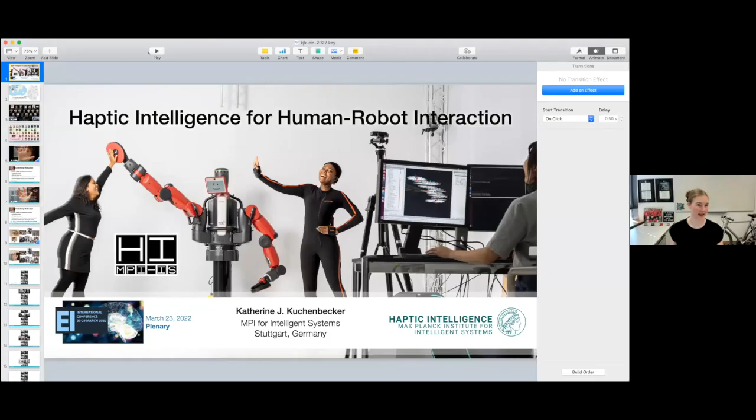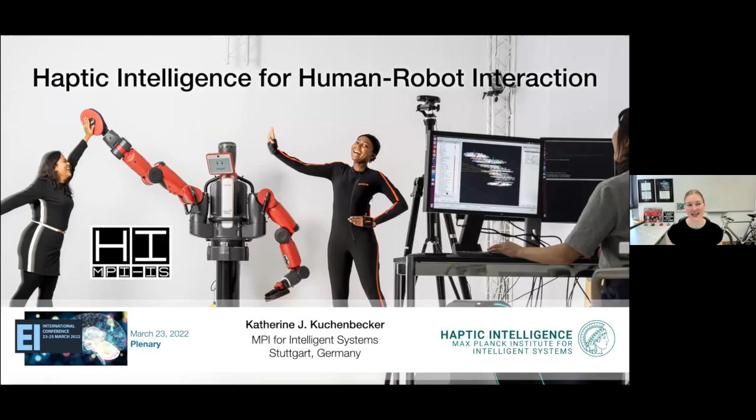My name is Katherine Kuchenbecker. I'm a director here at the Max Planck Institute for Intelligent Systems, and it's my pleasure to give this plenary talk to tell you a bit about research that my team is doing. Although my name sounds German, I'm actually American, and I grew up in Los Angeles. I did all my degrees in mechanical engineering at Stanford University. And I did a brief postdoc at Johns Hopkins with tomorrow afternoon's plenary speaker, Allison Okamura. So you should definitely go to her talk and all the other plenaries. It's really a delightful set of speakers you put together.

After I did that short postdoc with Allison, I started my faculty career at the University of Pennsylvania as part of the GRASP lab. I chose to go to Penn because it had this interdisciplinary spirit. It was in the engineering school between mechanical engineering, electrical engineering, computer science, and biomedical engineering. We had lots of connections to neuroscience and psychology, and they really transformed how I thought about research and what it meant to be doing interdisciplinary research in embodied intelligence, in robotics, in AI.

In January of 2017, a little more than 5 years ago, I moved across the Atlantic to the Max Planck Institute for Intelligent Systems. This is a map of Germany. We're here in the southern part of Germany. I work in Stuttgart, and we have another site in Tübingen. Our institute is quite young. We were only founded 11 years ago, and it's a big institution. We are extremely lucky to get generous taxpayer-funded research money for research in all areas of intelligent systems, which I think overlaps very well with the spirit of this conference.

Our institute has directors at the top. These are like the endowed full professors who stay here for the rest of our career. We have a wonderful set of group leaders who work here for 5 to 7 to 9 years and then go out and get a professorship somewhere else. Maybe in your field you know some of my colleagues, Michael, Moritz, Bernhard, Christoph, or Metin, or some of our group leaders. This region we call Cyber Valley, and there's really a lot of investment here, and it's a really exciting place to work.

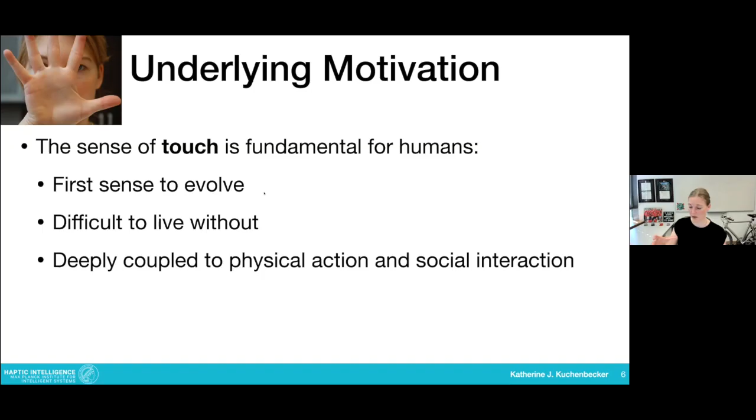So I want to reach out and pick up this glass of water. Touch is involved in how I move my body, how I come into contact with the world, how I stay safe, how I interact with other people, how I feed myself. And it's spread throughout your body. Unlike your eyes and your ears, which are very localized organs of perception, your skin is a huge organ and has many, many different channels.

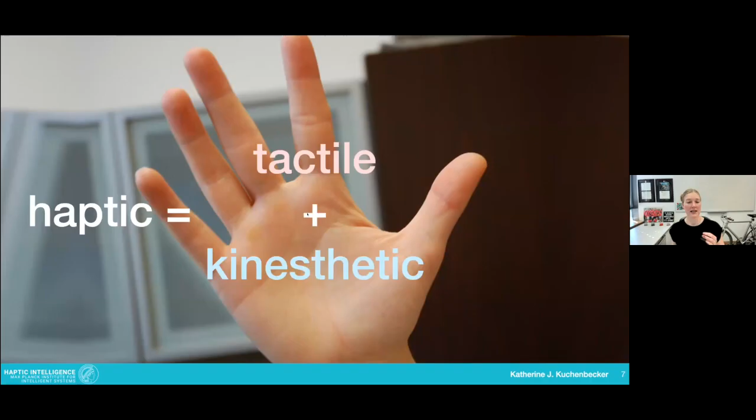And so when I talk about your haptic perception capabilities, I usually split it into your tactile system and your kinesthetic system. Some people call tactile cutaneous. This is everything that's actually in your skin, so wrapping you all around your body at the interface between you and the rest of the world.

And the mechanoreceptors that are embedded in your skin give you the ability to sense where contact is happening, how it's pressing, is it stretching your skin, are things slipping across your skin, is something vibrating against you, is a tool that you're holding vibrating as it hits something, as it cuts, is your skin changing temperature, is heat being added or removed from your body. And we have a little bit of proximity sensing in terms of hair follicles on the hairy skin.

It's also really important to understand that skin is not uniform. So the skin all over your body is adapted to the location. And so the number of receptors at the tips of your fingers is higher than at the next area of your fingers, and then the other areas on your palms. And that's the glabrous skin that is very finely tuned. And then the hairy skin has broader receptive fields, and it's not as densely innervated. And even among that, different regions of your body have different levels of sensitivity. And so there's a lot to know, but that's probably a good start.

Your kinesthetic system, also involved in proprioception, is knowledge of how your body is moving in space. And so this comes from, you can feel, not consciously, but subconsciously, the lengths and velocities of your muscles, the forces in your tendons and ligaments, and the angles of your joint receptors. And robots, like a robot we design and build, would tend to have sensors more like this, and not so much of these tactile sensors.

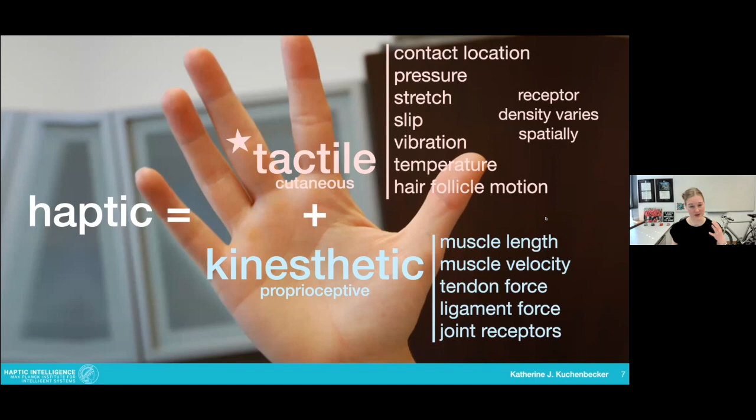And I think tactile sensation and feedback represents a huge uncapitalized-on opportunity for robotics and general technology. And so this is what I'm really fascinated in, and hopefully I'll get you excited about it today through my talk. So if the sense of touch is so important to humans, you might wonder why then so many engineered systems that we interact with each day basically ignore the user's sense of touch, or the sense of touch of the system. What do I mean by that?

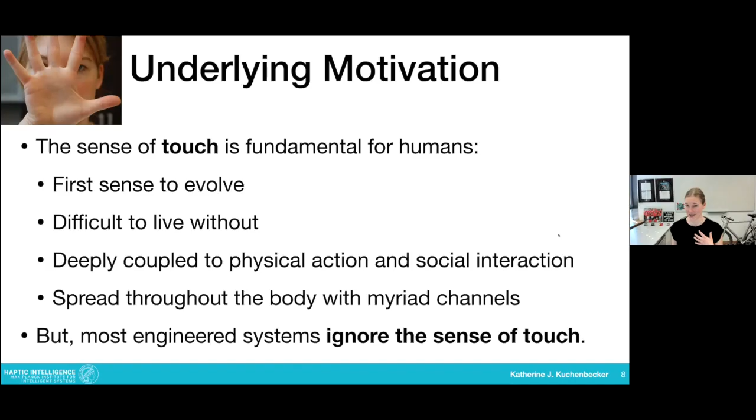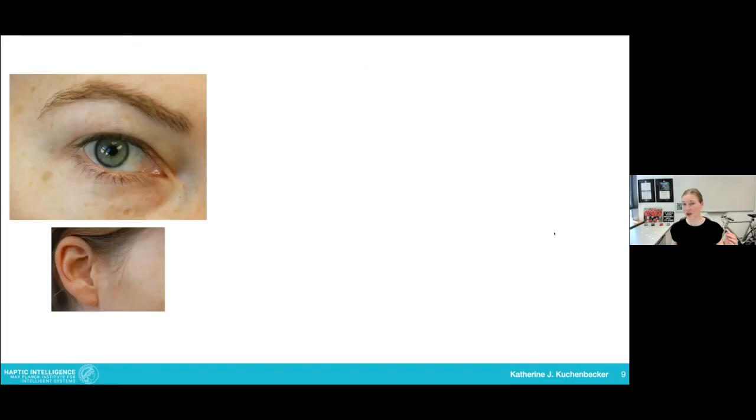I think if computers could draw a picture of what users are like, they have an eye, maybe they have two, probably just one, they see visual stimuli. You can hear things, and maybe there's a hand, or maybe it's just an index finger. My iPhone can feel when I touch it, which is good, but it never presents programmable sensations to me. I pet my cat, Toby, or feel fabric of something I'm shopping for online, and it always just feels like glass. We don't have digital display of haptic sensations on screens or in virtual reality. Systems can measure my motion, but they don't present sensation. So those digital virtual interactions that we can have are very different from the physical interactions we have in the world.

This also happens when people are remote controlling robots, say for robotic surgery, which is a topic I've worked on a lot. I can see very well inside the patient. These robots are being used right now around the world to operate, to remove prostates and do other minimally invasive procedures. But the surgeon cannot feel what they're touching. They can only see. And that's very different from manual interaction, from open surgery. And I think it's part of why this technology hasn't delivered on the promises that everyone thought, oh, it's the future, but you can't feel. You should be able to feel in the future.

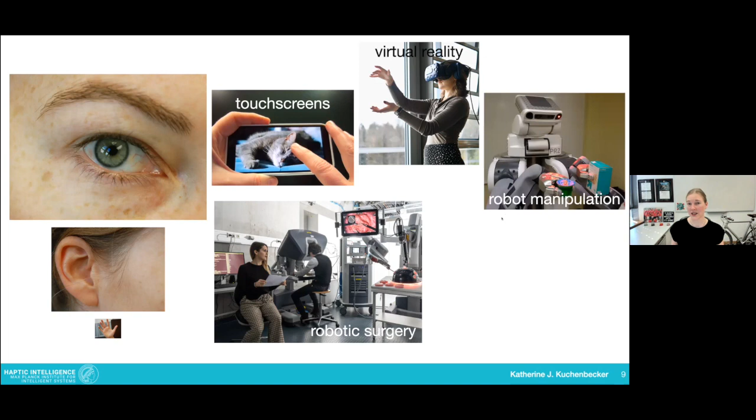If we then turn to robots more as autonomous agents or semi-autonomous agents, they also lack haptic sensation. I'll talk more about this, even when, and especially when, they're there to interact with people. They're basically numb all over, no sense of touch. People have a really hard time functioning with no sense of touch, but we give our robots almost no sense of touch.

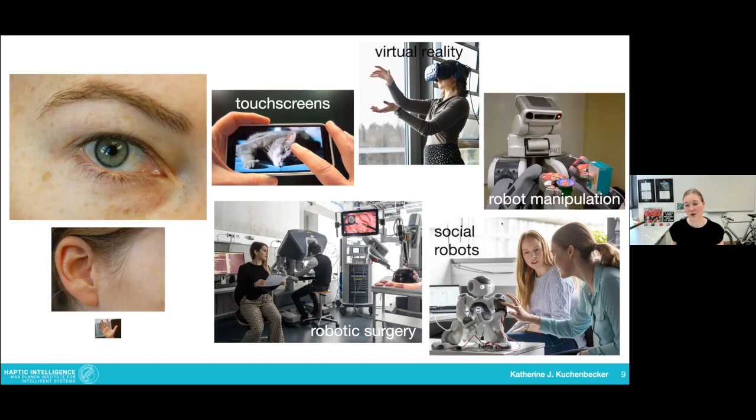So my mission as a researcher these days, I would say it very succinctly, is to try to bring physical interaction and touch cues more to the forefront in all these different engineered systems, whether that's feedback for humans or endowing robots with a good sense of touch so that they can more capably interact with the everyday world, which is unstructured and messy and has people in it.

So my team, we work in 5 main fields. There are a lot of overlaps between them, but at the basic level, we're often looking at how fingertips function, what you can feel. The mechanics of soft frictional contact are fascinating. We use some of that knowledge to design and refine and characterize haptic devices, which you'll hear more about in Allison's talk, but are mechatronic systems that create sensations for people to feel, either from a virtual world or from a remote environment when you're controlling a robot.

We work a lot on this, how to add haptic feedback as a user is controlling a robot remotely, how to understand their skill learning over time, how they can train, how they can improve more quickly. Can we automatically assess their skill? And then now turning more to where robots are an agent, we've also been doing a lot of work in physical human robot interaction. And then at the end, touch sensing, inventing new touch sensors. And it's these last two fields that I was asked to focus on in this talk today. So touch sensing and physical human robot interaction.

And I find there's a really virtuous cycle between these two, because there are very few good touch sensors in the world. We need more. But if we can come up with new approaches to touch sensing, then we can create new ways for humans and robots to interact together. And also on our needs side, maybe there's some kind of interaction we want to create, we can come back to the sensor engineers and say, oh, we need different kinds of tactile sensors than have been invented so far or than are available. And maybe we can create something that's more like this, and that can let us do what we want. And so I'll be talking about several projects in this domain today.

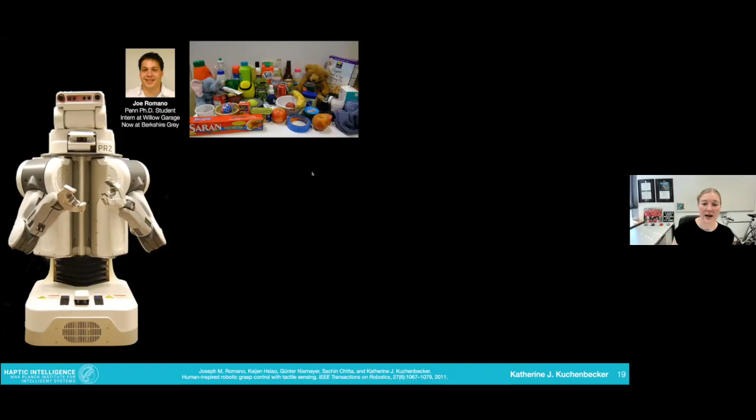And we took a lot of inspiration from neuroscience. This is a beautiful paper, probably my favorite paper, by Johansson and Flanagan, about the beautiful coordination of how the tactile receptors in fingers coordinate as you close and you feel contact, and then you lift. And then if something bumps you, how you react, or if you're setting it down, you don't move the glass right to the surface of the table and let go. You move down till you feel the contact, and then you let go at that moment.

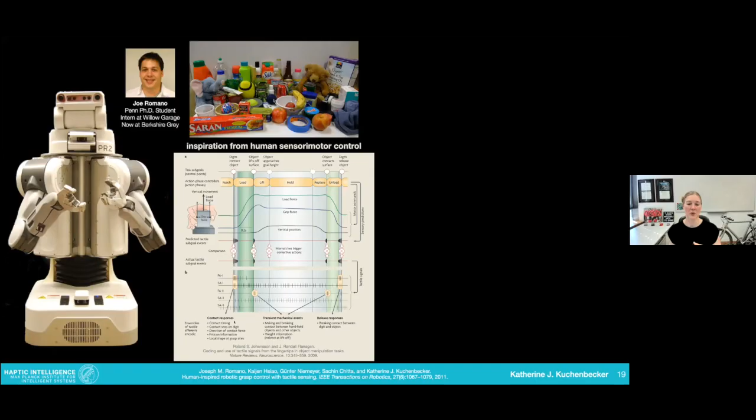And so we tried to endow the PR2 with similar kinds of AC, like event-based signals and steady-state signals, just based on its very, very rudimentary tactile sensors, which were just a very low-res 5x3 grid of pressure cells, which were very hysteretic and low sampling rate, like 24 hertz, if I remember, plus an accelerometer. And that accelerometer was really important because it's like a shock sensor. It's a high bandwidth vibration sensor.

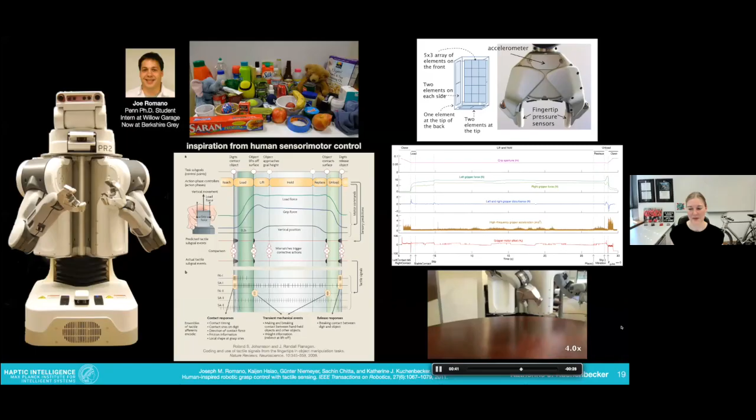So that would let us feel, if I'm holding an object and I'm moving it down, a transient when the object hits the table. Or in the pressure sensors, we could look at the high pass filtered version of the pressure signal and know that something had slipped and the robot should hold on tighter. Or if we're handing the object over, something had slipped and it's time to let go. And we found, even though the sensors were quite rudimentary, we could do a lot. This is a video of picking up and setting back down some objects where the robot doesn't know what they are.

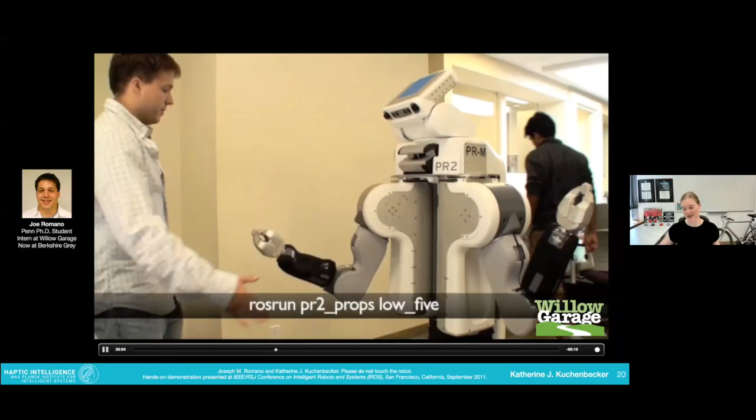We also did use this capability, the accelerometer, for high fives and fist bumps, which is lots of fun, but basically the robot's just moving through a trajectory and waiting till it feels the contact. I won't talk about this more today because today is not about accelerometers, but about tactile sensing.

Okay, so then we'd done that project with the PR2 and we wanted to do more. And I was working with Trevor Darrell on a DARPA project where we had to teach the robot perceptually grounded haptic adjectives. We wanted the robot to be able to touch things and not just pick it up and set it down, but to be able to feel it and describe it in words like a person would.

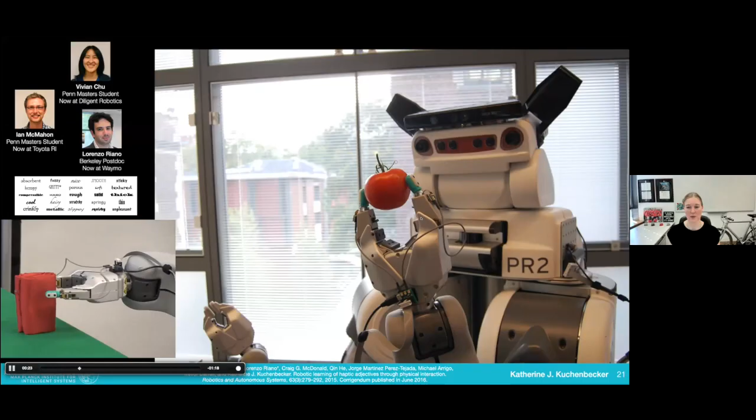So here's our vocabulary of adjectives, and we had the robot touch objects in different ways. But the sensors we had, which you can still see here, are nowhere good enough to get any sort of perceptual impression of the objects. So we endowed our robot with these BioTacs, which were and still are amazing tactile sensors that were developed from Jerry Loeb's lab at USC for prosthetic hands, but have also been used a lot for robotics.

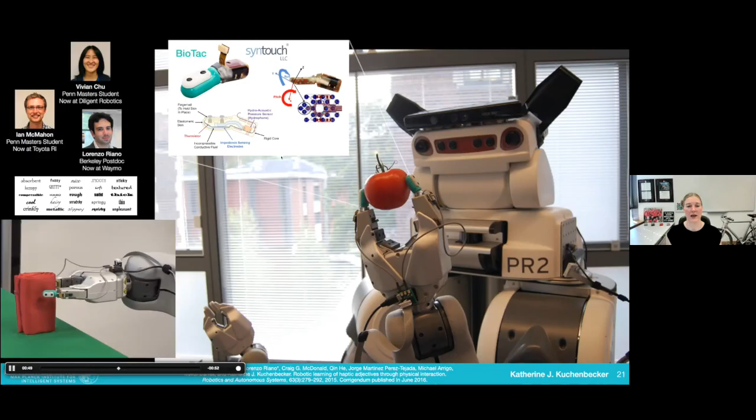So they basically have a saline-filled fluid chamber surrounded by rubber and electrodes that are doing spatial impedance measurements, plus a hydrophone, which is like an accelerometer, and a pressure sensor and some temperature sensing. And so we had all of a sudden multimodal tactile sensing, which was really exciting. But unfortunately, there were some shortcomings. We used them for a ton.

I love these sensors. But it's actually pretty hard to interpret these 19 electrodes. They don't have a physical interpretation. It's not really shape. It's an impedance. And it's a compact form, but it only has sensitive area on the outside. If you touch the robot finger on the back, it feels nothing. And they're really delicate. This ribbon cable broke so many times, and these sensors are expensive. They're like $10,000 or $15,000 each.

We broke a lot of them, and they're quite difficult to integrate into a platform. And so we had to run the little boards and the wires all down the robot arm. So it was great for research, but not practical for many other applications. And also, this approach for fingertip tactile sensing is clearly not going to work for the whole rest of the robot.

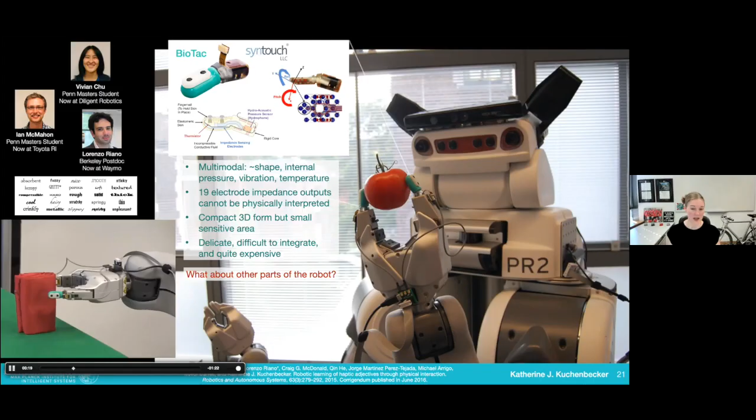And so this project showed me enough that I was really fascinated by tactile sensing and what you can pull out of tactile signals, but that we need better tactile sensors for robots, and that doing that would enable robots to become more intelligent and more capable in their interactions with people. So that is what I'm talking about in this touch sensing to physical human robot interaction cycle.

And after all these years of working with lots of different sensors and robots and applications, I can tell you what my wish list would be for tactile sensors. And so my ideal tactile sensor, first of all, would be soft. And soft is important for cushioning contact and also for allowing a load to be transferred, torsional or frictional load. It's really hard to control rigid contact. So softness is going to be really important.

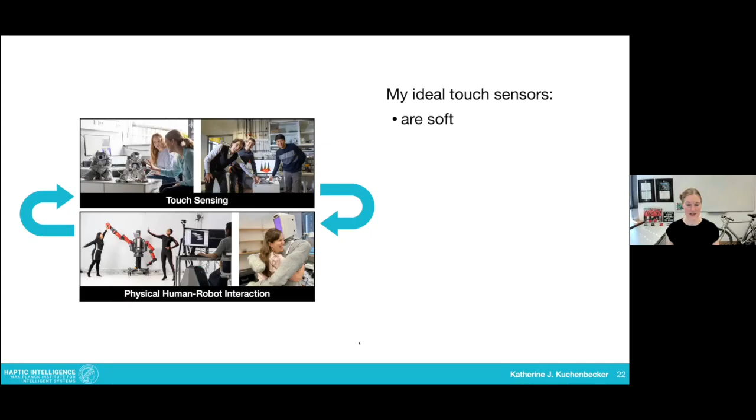I want to cover my whole robot. I don't want just tiny little pressure sensors. Something has to hit me right there. That's never going to happen. There can't be dead zones. There can't be blind spots. The whole robot, or almost the whole robot, needs to be covered and tactile sensitive.

I need especially, and this is often difficult, to tell the difference between no contact and contact, the start of contact, when something happens, because that means the contact state of the robot has changed. It needs to do something different. Either it's trying to form that contact or it's not, but it needs to know something new has happened. So I want it to be sensitive.

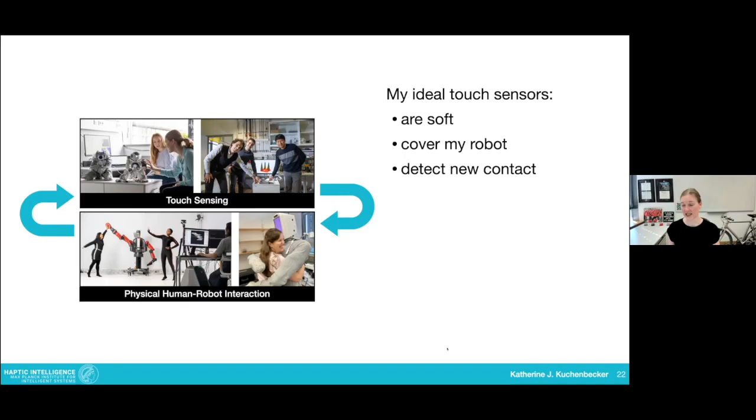But I also want it to have high dynamic range. I don't want to clip those signals. I want to keep responding as the pressure gets higher and higher. So I want it to be nonlinear in its response. I want it to be fast. Time delays are going to be no good. It has to be quick so that I can compensate for what's happening and react, whether it's a high five or something I'm crashing into or something that's falling. We need to respond quickly.

It needs to provide useful information. And this is kind of obvious, but what is useful really depends on the task, the part of the body, what you're trying to do with that robot. And I think too often we think of touch sensing as similar to our eyes. We want a detailed, high resolution pressure sensor, like I'm going to press into shapes and identify what they are.

And that's often not what we want. Maybe I do need that detailed pressure distribution, shape. Maybe I need shear, maybe I need slip, maybe I need just contact. Generally, contact happened, the frequency components of contact, that it's warm or cold. It depends on the application, what is going to be useful, which part of the sense of touch we should

be focusing on. We absolutely need sensors that are robust and reliable. Robots are going to crash. We need a lot of repetitions, especially if we're going to do anything with learning-based methods. They're going to hit things. Our sensors are going to break. They need to be pretty robust. Softness also helps there. They need to be reliable.

So even if it's not going to physically break, if it's constantly disconnecting, or the wiring has to be rock solid, and that's a very difficult engineering challenge. It has to integrate easily with my robot, which means it can't take up that much space, and they need to be low cost and accessible. And I like sensors that we can just design and build on our own and really understand how they function, that you don't need a PhD to understand the principle, or maybe you do, but if you can implement it just as an undergrad, a bachelor student, that would be, to me, really great.

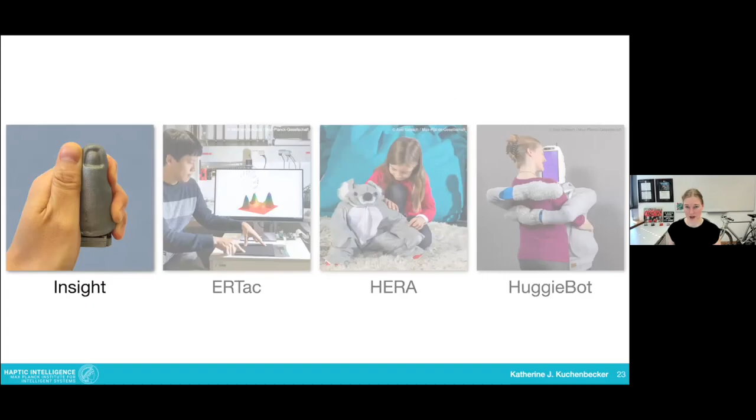So first, Insight. I'll start each project by showing the team. Team is really, really important to me, and highlighting the person who's leading the project. In this case, it's Huanbo Sun, who's a PhD student with my close collaborator and friend, Georg Martius, in my institute. Together we wrote this paper that was just published a couple of weeks ago in Nature Machine Intelligence. Georg and I also together have a new PhD student, Iris, who started about a year ago and is continuing this project. Georg and Huanbo have done lots of other cool stuff on tactile sensing, so you should look at their work as well. But I'm just going to focus today on this project that we did together called Insight.

Insight is a haptic sensor that is powered by vision and machine learning. And this is not biomimetic at all. We're using a camera to do touch sensing. Why? Well, there are a lot of great cameras available because of cell phones. They're cheap, they're robust, they can acquire a lot of data all together. They're small form factor. And what we do is we have this camera that's looking inside a device that's about the size of a human thumb.

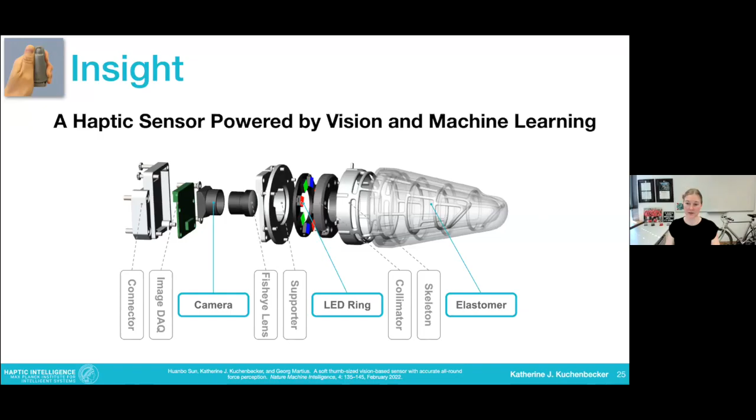It's a soft elastomer shell overmolded on a stiff skeleton. And it's lit up from the inside. It's opaque, so you see it's silver. And the camera can then see the inside of this hollow shell and figure out where touch is happening. We can see the whole thing really quickly and then figure out where contact is happening. So I'll explain some more of the details.

At every step in time, we take a picture, and pictures from Insight look like this. There's red, green, and blue LEDs, and we're seeing the inside. It's kind of corrugated elastomer. If something is touching, you can see little deformations there. We subtract a reference image, what it looks like when there's no contact, and then we pass that through a ResNet, and it outputs a force map. And this is a 3-channel, so XYZ force distribution of little vectors.

And I'll show that this is like all these little points along the surface of Insight. At each point, we can estimate in real time the force vector of contact that's happening there. You can see it has direction and the distribution of the pressure. And I think this is going to be really useful for manipulation and human-robot interaction. We haven't gotten to that yet. That's what Iris is working on for her PhD.

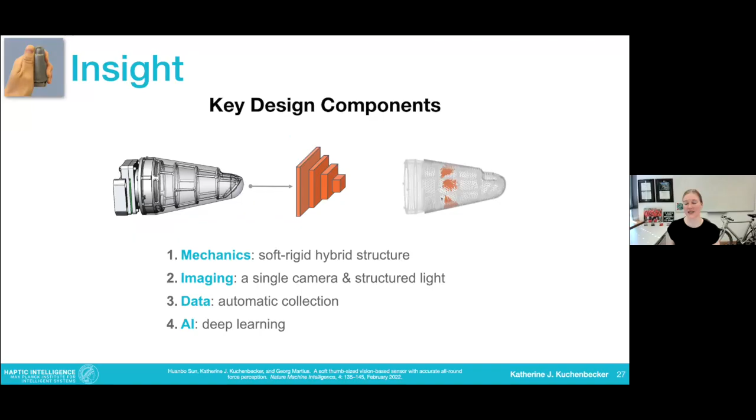I'll tell you what we think are the 4 key design components of this sensor. First, the mechanics. We need this soft elastomer skin so that it's sensitive, so little deformations cause something that can be seen by the camera, but it has to be strong. And this frame can withstand 40 Newton forces from all different directions. So we get this nice hybrid where we get a response, but it doesn't collapse, or it can maintain structural integrity.

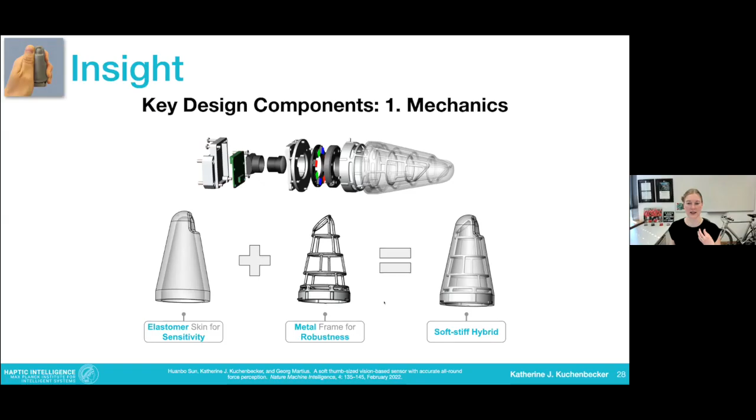The lighting was also more important than we imagined at the beginning. We have 8 LEDs, a collimator shapes the beams so that we illuminate the whole inside well. And we're using photometric stereo and structured light. Both of those principles allow the deformations to be visible to the camera. And then we need a big data set.

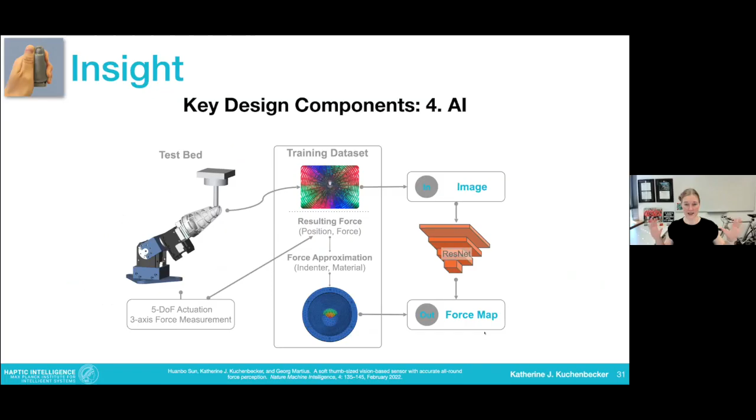And then we use deep neural networks. And this is definitely more Georg's domain than mine, where we train end-to-end from these images all the way out to the force map, and it learns, I see an image, I can tell you what the distribution of force is for what the contact is happening. And it together works really, really well.

We can see multiple contact locations. You can touch with multiple fingers at the same time and see the directions of contact, including shear, normal force. So it works really well. And we're really excited about this and want to keep building on it. Of course, we took inspiration from lots of other camera-based force or tactile sensors, but we think this is kind of a special, different approach.

We were able to achieve an overall spatial resolution of 0.4 millimeters and 0.3 newtons in force magnitude accuracy, root mean square. The forces we can detect with a direction accuracy of about 5 degrees. And we were actually really surprised and excited to see that Insight can feel its own orientation relative to gravity, because gravity pulls the soft elastomer slightly in a different direction. And so it can even feel its own pose.

Yeah, so we're going to keep working on this and make it smaller and faster and easier to integrate with robots, and hopefully then do things with robots and people. So keep watch for more things in that direction. So that was Insight. Next, we're going to move to this ERTac, electrical resistance tomography tactile sensors.

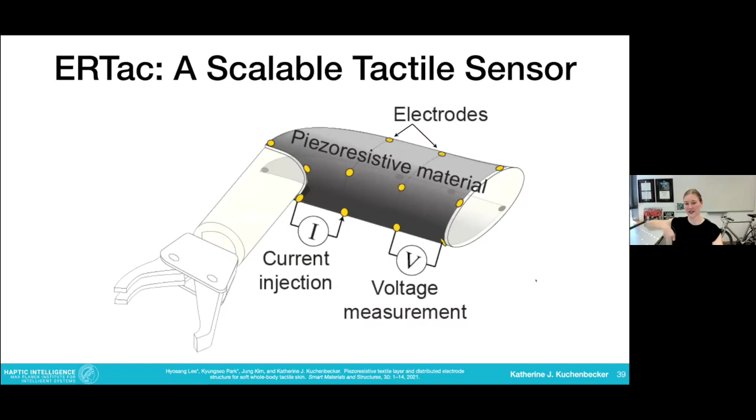And so we created an approach where we have a piezo-resistive material where when it locally gets deformed, the resistance changes there. And we intersperse it with electrodes that we do have wires coming back from. And then the principle is that we can choose any pair of electrodes and we actually scan across to different pairs. Let's say we pass a current between one electrode and another, and that creates a voltage distribution. And then we measure that voltage distribution and we scan all the way across the surface, like the part of the robot's body, and we can reconstruct how the voltage was distributed.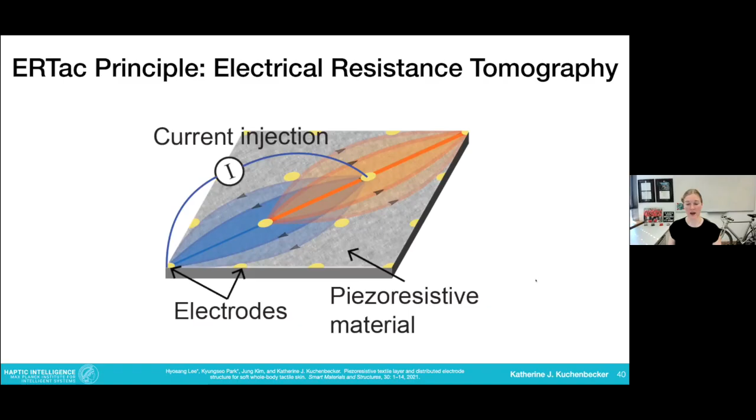And because the material, the skin, is piezo-resistive, that means we can reconstruct the distribution of pressure across the robot's skin. And what is inside this material, what we built, are these low resistance, basically very conductive patches on top of high resistance fabric. And so when there's no contact, the contact resistance between the top layers, the conductive patches, and the lower is high. And so the current, when we pass that current through, it just has to go through the high resistance fabric.

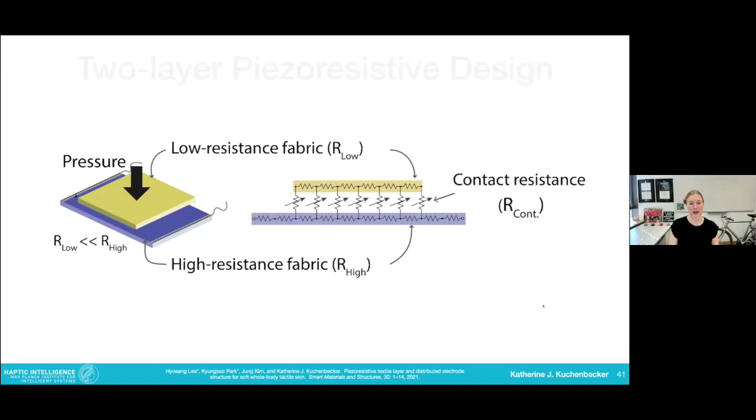But then when someone pushes down in a region, like the robot's bumping its arm into something or someone's pressing on it, that contact resistance goes down very quickly. It's nonlinear. And then locally, the current can jump and flow through these patches and get a low resistance region. And that's distributed all across. We have lots of these little patches and lots of electrodes. And then all together, it gives us this structure.

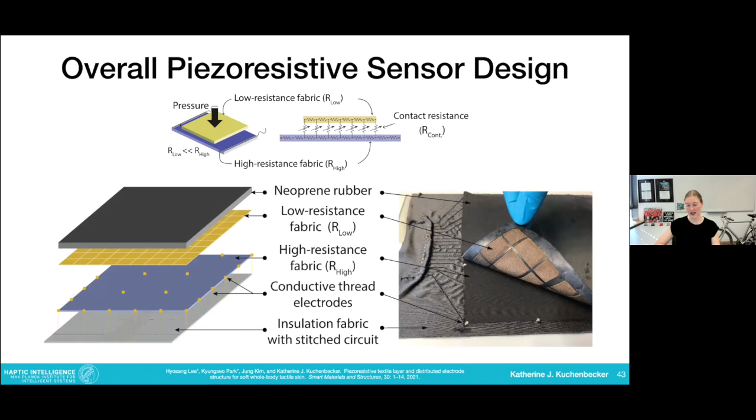So this is how it looks when it's fabricated. We use a laser cutter to cut the patches and adhesive to put the layers together. We sew the circuitry with conductive thread. We use electronics to scan through the different pairs and gather this data at a very fast frame rate, usually on an FPGA. And then we do the math in real time to do this electrical resistance tomography, basically reconstruct the resistance across the surface.

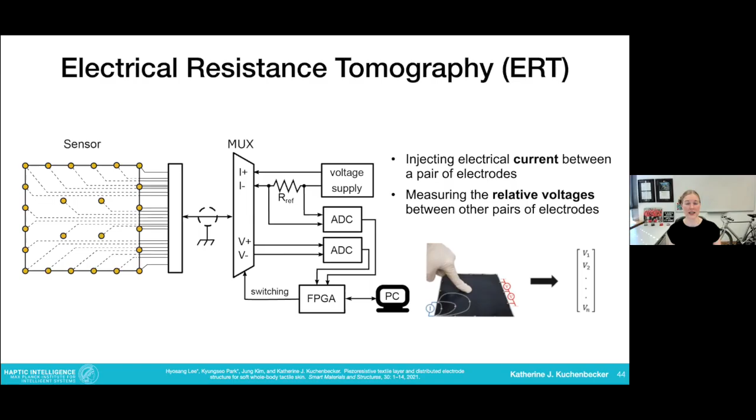And this is definitely taken from medical imaging. The voltage measurements to the conductivity distribution we base on physics. And then to calibrate from the conductivity to pressure, we do some simple measurements to get a field, because this depends more on the manufacturing and the materials. And we also have done a lot on figuring out what is a good scan pattern. Not any pair; some pairs aren't very good when they're close together. They don't give you very good visibility, but choosing a more optimal scan pattern over time is also interesting.

In the end, we've been able to show that we can get very low localization errors, so root mean square down to like 8 millimeters across a really big area. It's like 20 centimeters by 20 centimeters. Pretty good 2-point discrimination, similar to the stomach or the back of a human. And it's important, we're not just doing contact location, but also force. So at every level, we know the pressure. We're estimating how strong. So it's going up the harder you push on it.

And I'll just show you the videos because that's probably the most convincing evidence. This is Hyosang pressing on different areas of our sensor. And you can see in real time, the reconstruction shows where he's pushing. And he can push with more than one hand. We did also test without the internal electrodes. The internal electrodes have a big improvement of the resolution, especially in the middle. So I'm only showing that version. You can see 2 contacts. You can't even visually see which one he's pushing on, but the sensor completely knows how hard he's pushing.

And then this right video just shows the impact of the calibration. So we have a constant mass. On the left, we're showing without the calibration. You can see as he moves it to different locations, it doesn't know the pressure. It's just knowing the resistance. And many other teams use this approach, but they don't go all the way to force.

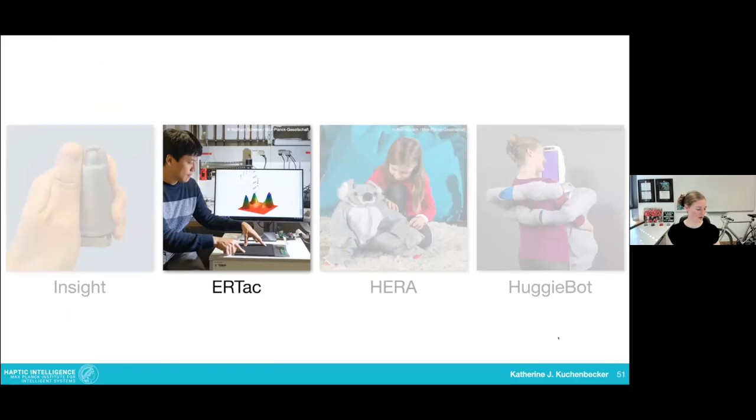As I said, we've worked on various aspects of the project. It's really led by Hyosang. We've also done adaptive optimal measurements and using deep learning and simulation to reduce the amount of real data that we have to collect and improve the accuracy. But I think I'll stop talking about this now and move on to the third project, which is called HERA, the haptic empathetic robot animal.

And this project is led by Rachael Burns, one of my PhD students. Hyosang is also involved, as is Hasti Seifi, who was my former postdoc and is now an assistant professor at the University of Copenhagen. So far, we've published 2 papers. The first, we interviewed autism specialists and got a lot of input on what they might imagine for touch sensing for a robot to help children with autism. And then this most recent paper, which was just accepted a week or 2 ago to Frontiers in Robotics and AI, on endowing a NAO robot with practical social touch perception.

I'm just going to tell you about this part of the project, which is about the sensing. So Rachel's overall goal is to create a robot, a haptic empathetic robot animal that can help children with autism learn more safe and appropriate touch behavior.

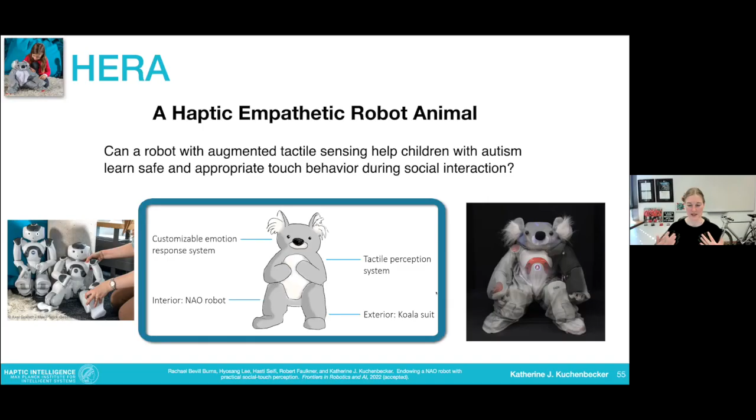And NAO robots on their own are very commonly used. They're little humanoids that are often used with children with autism and lots of other educational activities, but they have almost no touch sensing. They have just little capacitive touch sensors on their hands and their head and foot bumpers. So we have built a tactile perception system that we can install onto NAO, and NAO also wears a koala suit, and then we're working on its emotion response system. But today I will just talk to you about its tactile perception system.

So we use a very simple resistive-based tactile sensor. We have a top electrode, low conductivity foam, and another electrode, and when pressure happens, it just reduces the resistance. We put it in a voltage divider. Here we're not doing contact location at all. So each sensor is monolithic and has just one taxel. We want to cover the robot's whole body with something that's practical, that a therapist could use, and that will be robust. So I have a video that I'm going to show.

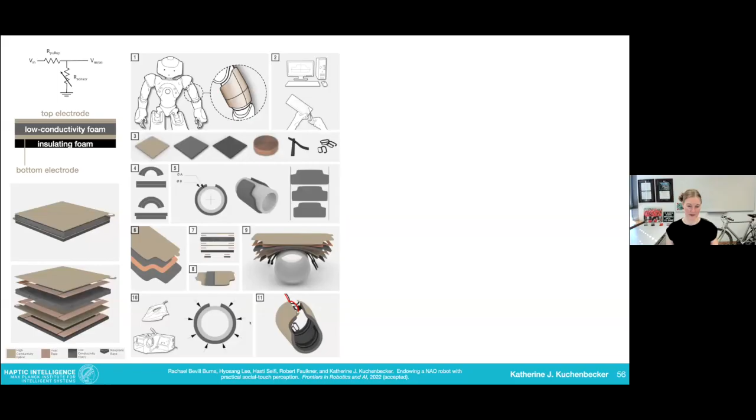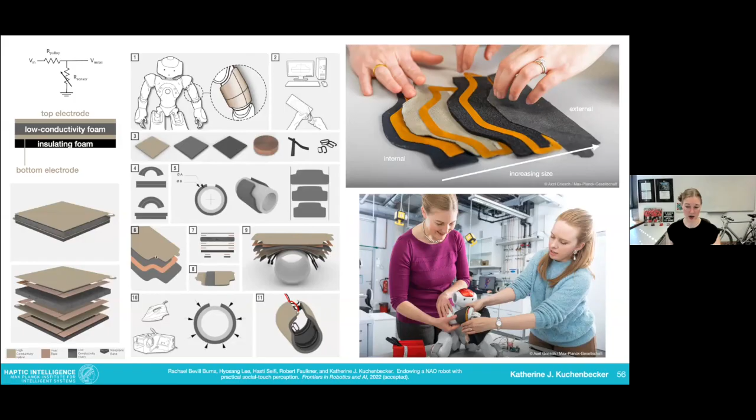This is showing a little bit about how we make them. One thing is important to note, here's some photographs. The layers that we build: there's a bottom layer of foam, and then a conductor layer, and then the low conductivity foam, and then another conductor. That's that sandwich. In the beginning, we would make them flat, like you see here. Then we would bend it onto the robot, and it would totally not work because that bending deforms the foam and pre-stresses the sensor. And so now we've learned to make the sensors so they fit around and are not stressed from the beginning. And I'll show you how we make these tactile sensors.

And also with this paper, we've released all the patterns for how to make these sensors for the arm of the NAO. In the future, we'll release the whole body. You assemble your materials, so foam, the non-conductive foam.

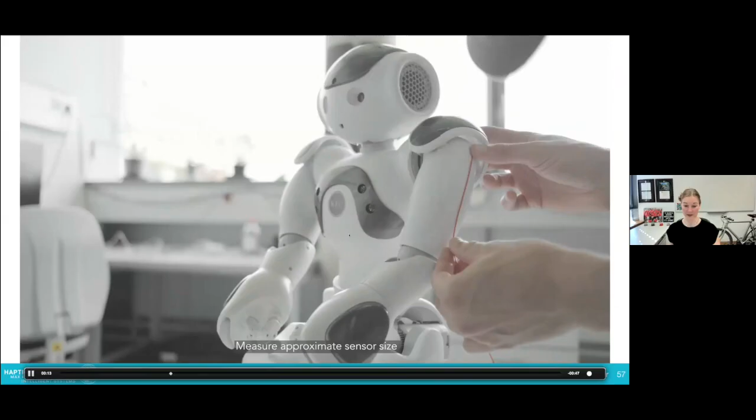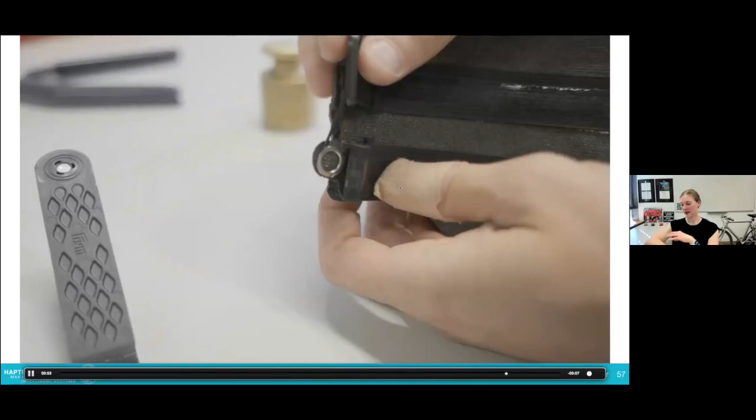So you see how we're cutting the different pieces and putting them together, and it's very important to see how the internal layers that will be closest to the robot's body are smaller, and that way, when we wrap them around the curvature of the robot's body, they all line up and aren't pre-stressed. And then we heat fuse them either with a hand iron, or this is a mug press. This is how they put designs on coffee mugs. And we get this pre-curved 3D one-taxel sensor per body segment for the NAO. And now I'll tell you a little bit more about what we can do with that.

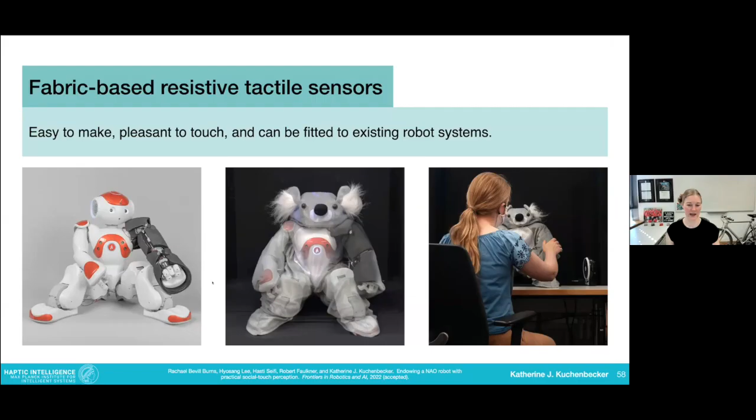So far we've made just one arm, and I'll show you how we validated that. We brought people into the lab and had them touch the robot and show different kinds of social touch gestures that the autism therapist had told us would be useful. In particular, we had them demonstrate things like stroking the robot's hand energetically, or in a moment, the participant is going to be asked to hit the robot. People actually don't like hitting the robot, but you can watch the real-time data streaming across here.

So even though we have only 4 measurements, so the 4 body parts, shoulder, upper arm, lower arm, and hand, we get really nice, rich data in the patterns over time. That's why it's important that the sensor respond quickly, and we get this rich data stream. So we had 15 people come in and touch all 4 parts of the robot's body with these 5 different gestures at 2 intensities, and they did 3 repetitions. We have this big data set that we then parsed, and then did some simple machine learning on basic features using a random forest.

We got very good classification rates on just little individual windows of data, knowing which body part is hit, whether they're at the gentle or the energetic intensity, and that hasn't been studied very much. We're very interested in intensity, and this was our first 2-level version of intensity, and it's pretty good at doing the different gestures. It gets a little bit lower when we're doing intensity and gesture at once. But a big part of this is that people don't do the same thing.

You say gently stroke, and some people are gentle and some people are a little more violent, and vice versa. So there's a huge variety in what people did. This was very uncontrolled data. So we're really happy with this data set.

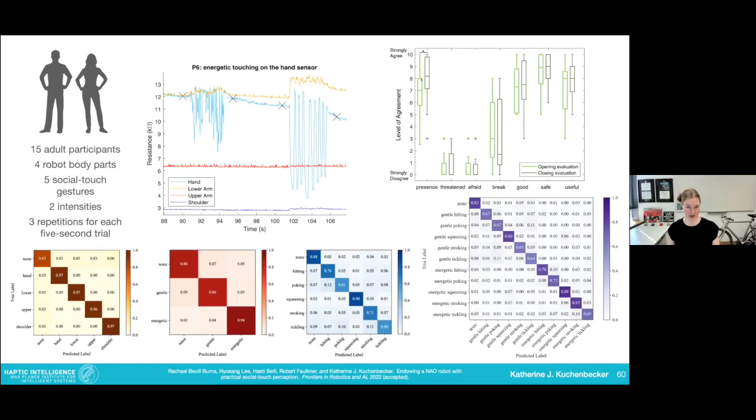People also gave very good evaluations of the robot. They weren't afraid of it or threatened by it. They thought it was a good idea and useful. And interacting with the robot significantly increased their appreciation of the presence of the robot. So these are our results just about the tactile sensing capabilities. We're continuing to work on this project, and I'm really excited that we're going to have a NAO with full tactile sensing all over it and what it can do.

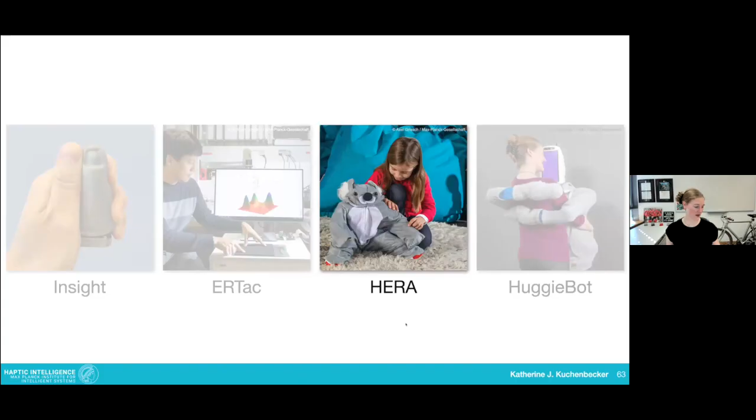And now I'll tell you about the last project that I wanted to describe today. And that is HuggieBot, also a social physical human robot. This project is led by my former PhD student, Dr. Alexis Block. She finished her PhD at ETH in August. She's now a postdoc at UCLA. And we just heard a couple of days ago the very good news that she won the Otto Hahn Medal. The Max Planck Society, this is our thesis award. They give about 30 of them a year. And I'm really proud of all the work Alexis did in her PhD on HuggieBot.

This is a collaboration also with professors at ETH and again with Hasti Seifi. We published many papers, and I thought I would mainly tell you about one that was just accepted a couple of weeks ago to the Transactions on Human-Robot Interaction, which describes what we call HuggieBot 3 and a little bit also of HuggieBot 2. So this is called In the Arms of a Robot. It's about if you're hugging someone and you squeeze them or pat them on the back, we would like robots to be able to do that too.

Okay. Why make a hugging robot? You might be sitting there thinking this is an embodied intelligence conference and hugging sounds pretty stupid, but actually hugging is really good for humans. Hugging provides us with social support and strengthens our immune system, increases our oxytocin levels, and it alleviates stress. Before I came to work this morning, I asked my husband if I could get a big hug because he knew I was doing this talk. It has a tangible physiological improvement, social contact and hugging, deep pressure touch.

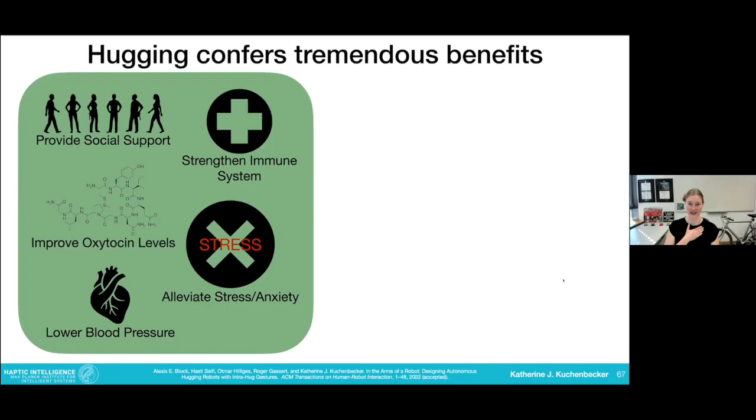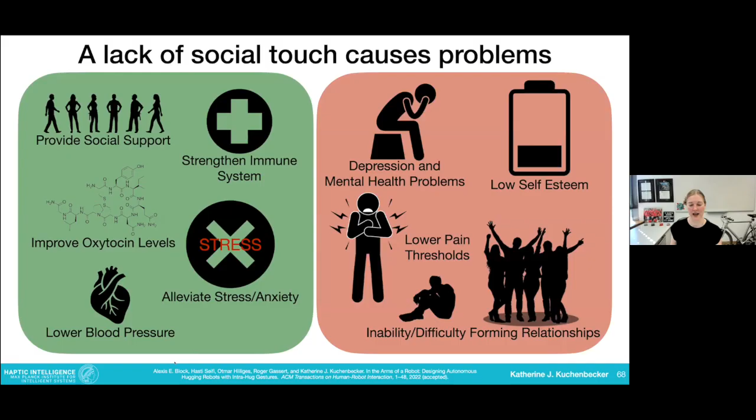And when we don't get enough hugs, which might have happened to you, like it happened to me in the pandemic, we become more at risk for depression or other mental health problems. Our pain thresholds go down. We have lower self-esteem, and we may have more trouble forming relationships, especially babies or children who don't have touch in their lives can struggle socially.

And so people have created hugging robots before, and there were two main categories of hugging robots we found in the literature. One is these big, animal-like robots that sit on the ground. It's mostly for children. You have to crawl over to them. And also a lot of smaller, very impressive, more like pillow-sized robots. But especially these, they don't hug you back. You hug them. They're a sensor. They can feel. They might talk to you, but they don't physically hug you back. And that physical contact, that physical squeezing back, is known to be really important. And so in the middle are more human-sized anthropomorphic hugging robots. And we're especially interested in autonomous robots.

For her master's thesis with me, Alexis made HuggieBot 1.0, which is the same PR2 you already saw in a purple furry outfit with heat. And this was published in IJSR a few years ago. And people did like hugging the PR2 much more than we imagined. And that convinced us to do Alexis's whole PhD on hugging robots. But this platform had a lot of shortcomings that we addressed by building a full new platform that I'll tell you about now.

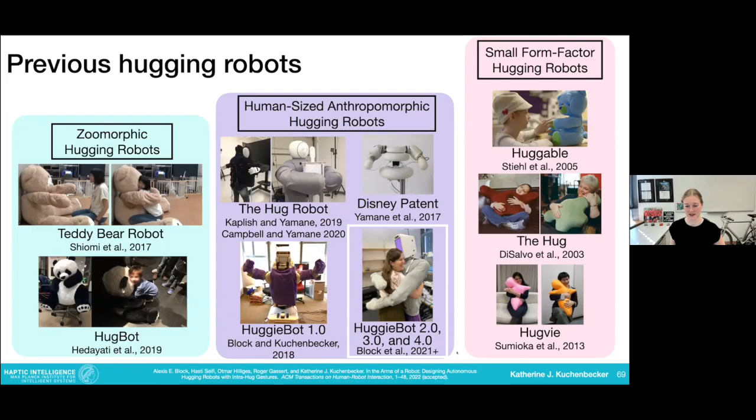Over the course of Alexis's PhD, we created 11 design guidelines or commandments for hugging robots that we hope can generalize to other robots beyond ours, and also just generally to helping robots or robots that are going to work around people. These 5, I'll highlight in terms of HuggieBot 2.0. And this was published at HRI last year. This is the International Conference on Human-Robot Interaction.

I'll just play the video while I narrate so you can watch people hugging our robot. So the robot has a V-shaped frame that lets you walk up close to it. It has 2 Kinova Jaco padded arms, heating pad, an inflated torso, soft clothing, a screen so it can show you its face, and it has a camera so it can see you.

And it's really nice and huggable. It's soft and warm. It's human size, the size of an adult human. And it adjusts to you, if you're bigger or smaller, or over to the left or the right. It's basically closing like a hand would grasp an object. It's like a big two-fingered grasper, but it's a hugging robot.

And it stops when it feels you. And when it feels that either the pressure in the back has lowered because you've let go, or an increase in the torques because you're leaning back, it lets you go and you can end the hug. People really don't like it if the robot hugs too long and doesn't let you go. You have to let the user go. We don't want to stress people out.

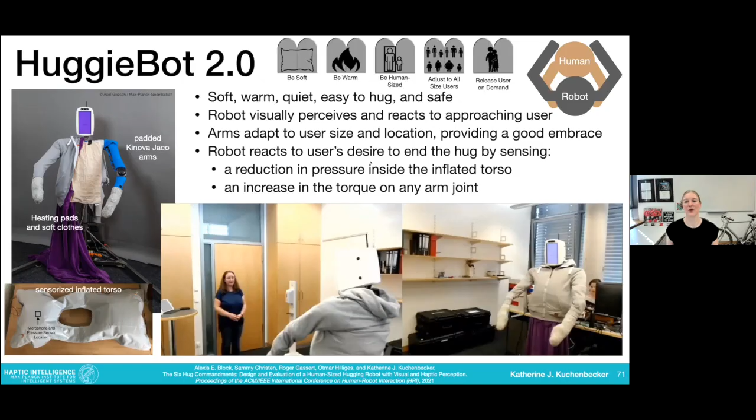So this was HuggieBot 2.0 from last year. And it's very fun to hug. There were a couple of shortcomings though. One of them was the vision. We hadn't in the beginning estimated the user height. And if you're very tall and the robot hugs you at the same height, it will be hugging you around your butt. If you're very short, it'll hug you around your neck. And so taller and shorter people didn't like being hugged by the robot as much.

So obviously the robot should see you and adjust to how tall you are. And it should also synchronize when it opens its arms and when it closes to your approach. I'm not going to talk more about that, but those were very important to improve. But the main thing I want to talk about is these intra-hug gestures while you're in the arms of the robot. And this is this paper in Transactions on Human-Robot Interaction.

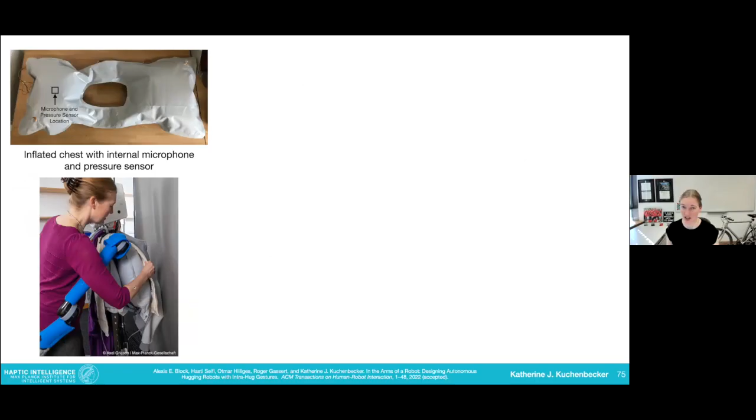So here you can see I've taken the clothes off the robot, so you can see this inflatable, we call it HuggieChest. This is just made from pieces of vinyl, like a beach toy, inflated, and with a microphone and a pressure sensor inside. And that's what forms the torso of the robot. We don't have distributed tactile sensing. We have a single microphone and a single pressure sensor in the back chamber.

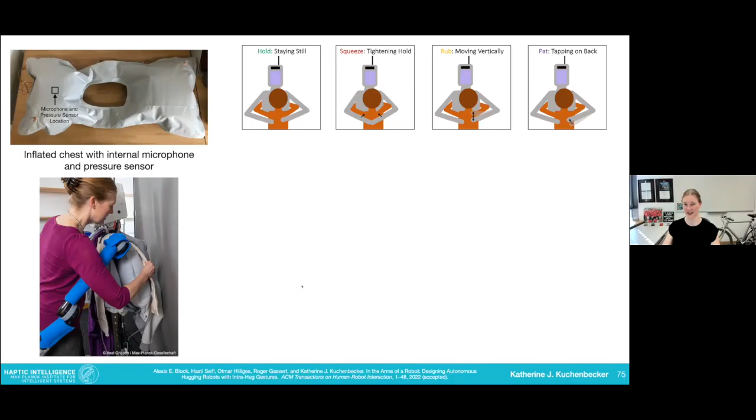And for this study, we defined four gestures: just holding the robot, squeezing it, rubbing your hand, and patting it. So sort of just pressing in, lateral motion, and impacts. And here's some sample data of different participants in a data collection study that we did. You can see what it feels like to the robot, on the pressure sensor and the microphone, to be held, squeezed, rubbed, or patted.

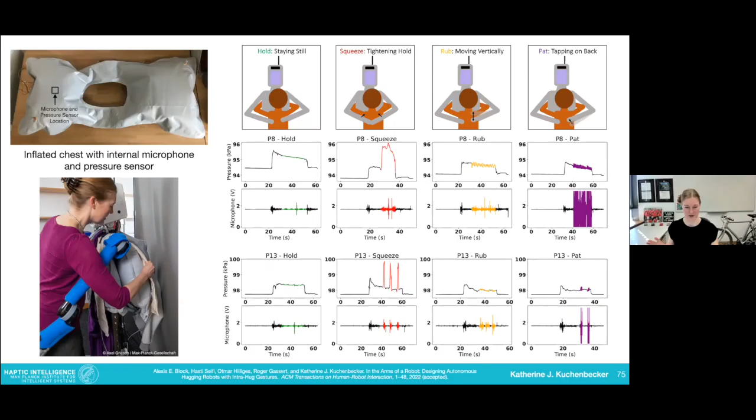Everyone does things differently. Some people are very violent when they pat. Other people are much gentler. Some people squeeze over and over. They do all sorts of things. They wrestle around. So we collected a big data set. We again use real-time machine learning on little windows of data to recognize what the user is doing. We can do it pretty well.

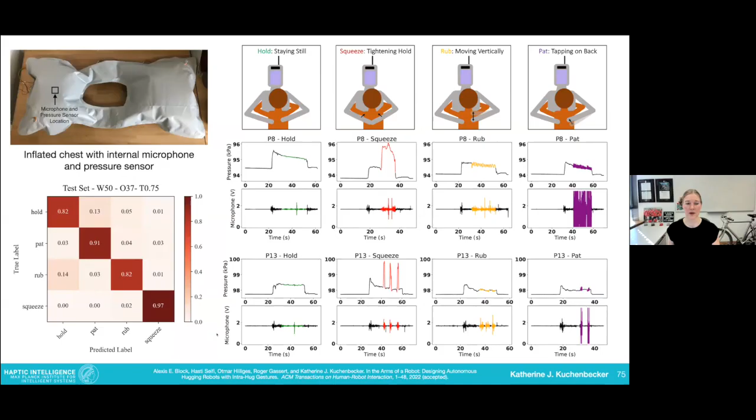First of all, people really like it when the robot responds to something, whether the robot responds with a rub or a pat or a squeeze. They really like that the robot does something in response to them. The only thing they don't like is when they do something and the robot does nothing. So you're holding the robot, you pat it and it stays still. Many people think this is a rude robot.

Surprisingly, people really liked it when they were holding still and the robot proactively rubbed or patted or squeezed. People especially love being squeezed. Squeezing is very comfortable. It comes back to deep pressure touch. And so people just generally really liked it when the robot did stuff, but it was important that the robot feel when they do something.

We had initially hypothesized that the robot should do what the user did, but that wasn't at all what we found. Instead, people want the robot to be more creative. So we programmed a probabilistic behavior algorithm for the robot to decide based on preferences, preferentially choosing more favored responses, but not being predictable. And now here's a participant in our study. The robot says, "Can I have a hug, please?"

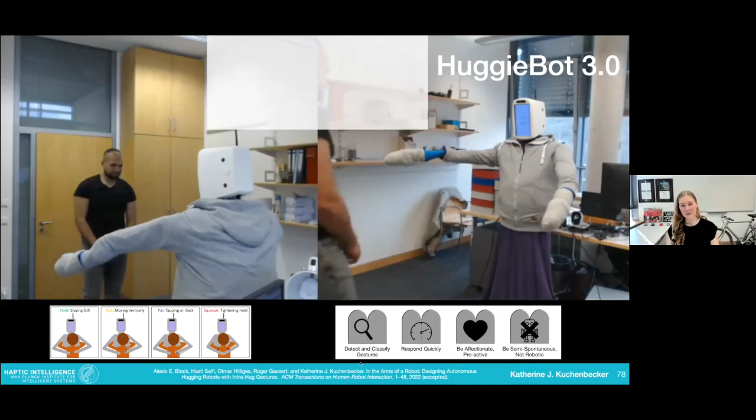And he walks in, it sees that he's a tall guy, and now it's closing in, and it's collecting a baseline pressure reading, and now he's holding still, and the robot knows that. And now watch, I think it's this hand here, he's about to pat, and the robot feels he's patting, and the robot rubbed him in response.

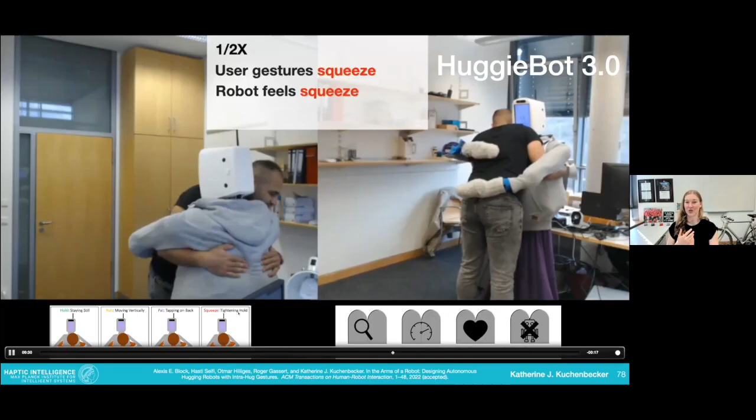Now the robot is squeezing him, now he's squeezing it, the robot feels that he's squeezing, now he's patting again. And then you have this intimate interaction. I know it's hard to see, you can sort of see the robot hand here. Now the robot's like, he wants to let go. He's done with his hug.

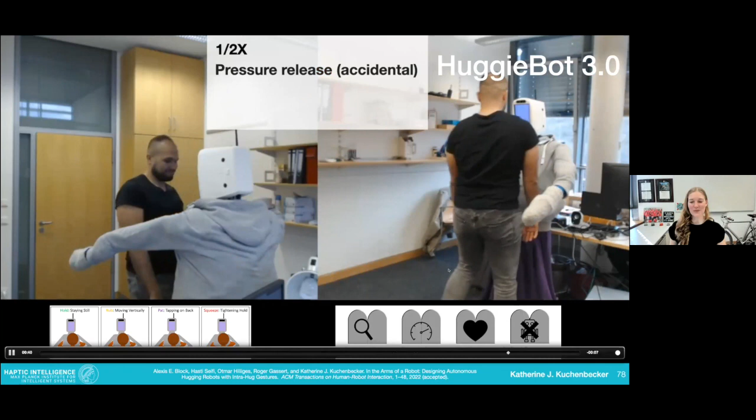But we tested a lot of people in these hugging interactions. And it's really actually very fun. Our robot can detect and classify these gestures, respond very quickly. It's proactive and doesn't feel robotic.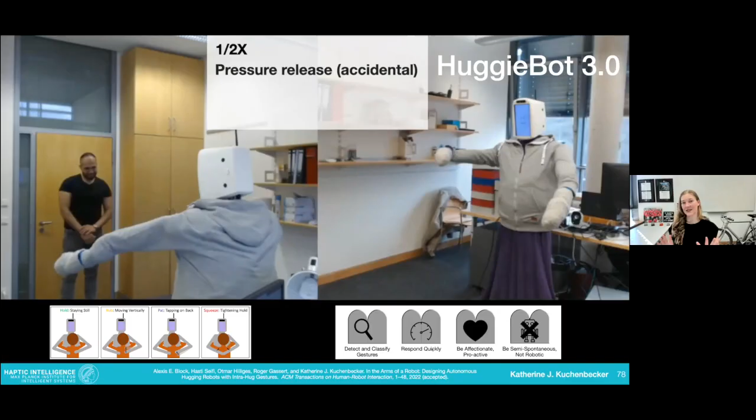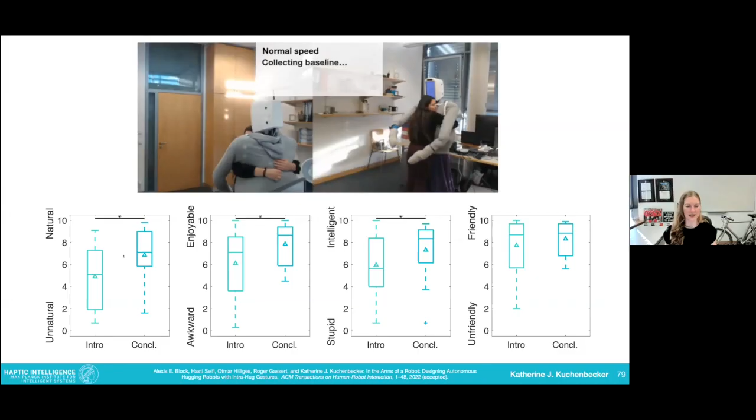Here I'll play, this is another participant, and then just along the bottom, you can see they hug the robot a couple times at the beginning and a couple times at the end of the study. And these are their impressions of how natural the robot is, how enjoyable it is to hug, how intelligent the robot seems, and how friendly. We saw significant improvements after these hugging sessions, except in friendliness, but the robot got very, very high friendly ratings at the beginning.

So overall, I wish I could let all of you hug HuggieBot. I think you would enjoy it much more than you imagine. And you would believe me more than me just showing you videos of happy people hugging and squeezing and rubbing a robot. But we think this is actually something that could provide a benefit to people, not to replace human hugs, but to supplement them for times when a human hug isn't available.

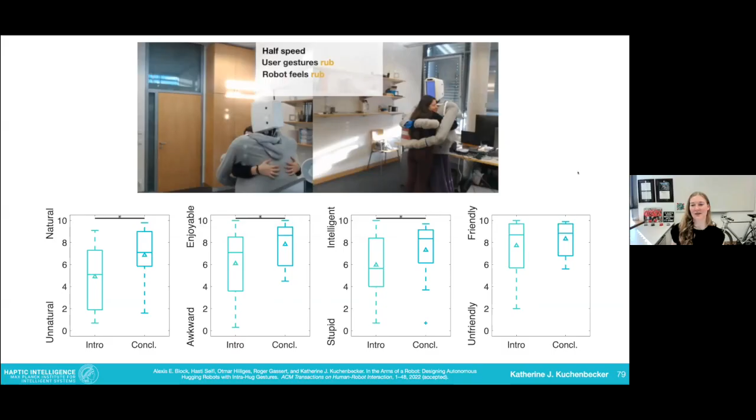So that is HuggieBot. And if you want to learn more, this paper is on arXiv. It's not yet on the THRI website, but you can find it on arXiv. And there will be more in the future as well. There's one more chapter of Alexis's thesis that we haven't published yet. So that's the 4th project, HuggieBot. And I know it was a whirlwind, but those were the main things I wanted to tell you.

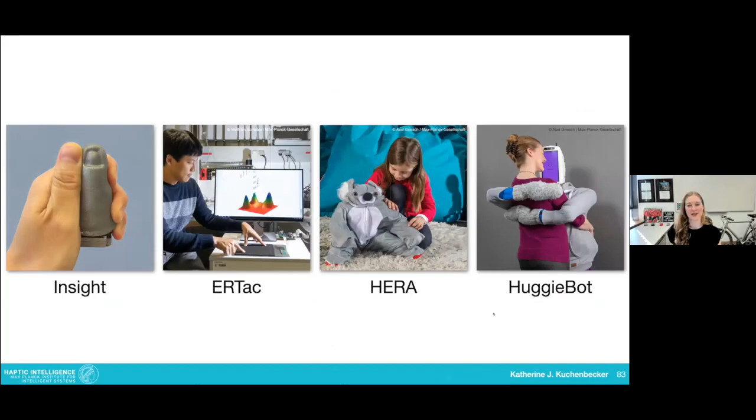And now I've hopefully given some credibility to the hopes that I wanted touch sensors to have. These are some directions that we're going. Maybe a few overarching ideas you might have taken out. I think the sense of touch is important for robots, for people. I don't think it gets enough attention. It's multimodal. It has many different channels. We don't understand it very well yet.

Robots need to have in their sense of touch broad spatial sensitivity and high temporal bandwidth. It doesn't work just to have one little touch sensor in one place. We can use individual sensors that have high bandwidth or broad receptive fields to instrument large robot parts. I think this hasn't been tested very much, and I think it has a lot of promise. And any algorithm that we're running has to be able to work in real time, so the robot can respond very quickly to whatever the human or the object has done or has happened.